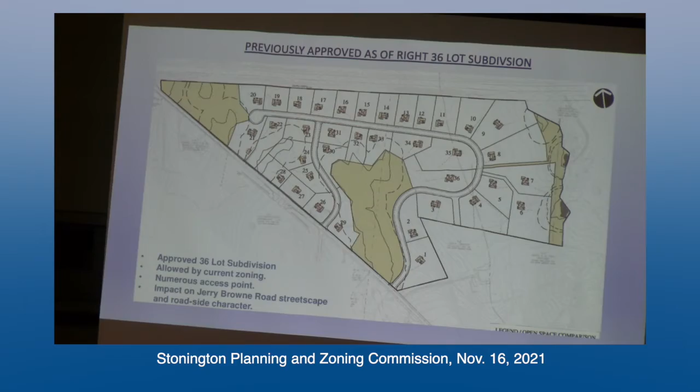What we are proposing tonight is a map and master plan amendment and a zoning text amendment to allow 120,000 square feet of professional development or medical on 8.2 acres, additional 123 apartment units on 16.3 acres, no change to the neighborhood housing of 7.7, and no change to the preservation district of 35 acres of open space.

Tonight you'll hear from Dave Lattizori regarding the completed development, Gene Winchester regarding the medical development, Don Poland regarding municipal fiscal impact, Dave Sullivan regarding traffic, Todd Ritchie on engineering, and Rob Goodman and Tim Wentz regarding the architectural design. And Jim Cowan is also here to discuss any wetland issues that may come up.

I will not steal their thunder, except to say I've been a patient at the Hartford Healthcare Facility. The access and parking were convenient. The waiting area overlooked the open space and was beautiful. It added immeasurably to the experience. The examination room was up to 21st century standards, as you might imagine for Hartford Healthcare. These facilities give Stonington residents and the surrounding southeastern Connecticut area world-class choices and options in medical facilities and housing.

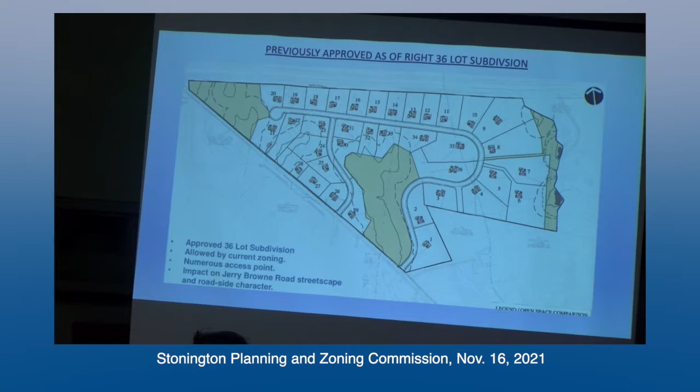Up here before you is the 36-lot subdivision, which was approved as of right for this site. It only preserved 15% of the property as open space. It was comprised of 36 single-family houses on 1-acre lots with around 8 curb cuts out onto Jerry Browne Road. And I was 1 week from selling this to a home builder.

And a resident at Stone Ridge, a doctor, approached me and said, "Is there something better you can do with this site?" And I went back to my family and I said, I think really there is something we can do better.

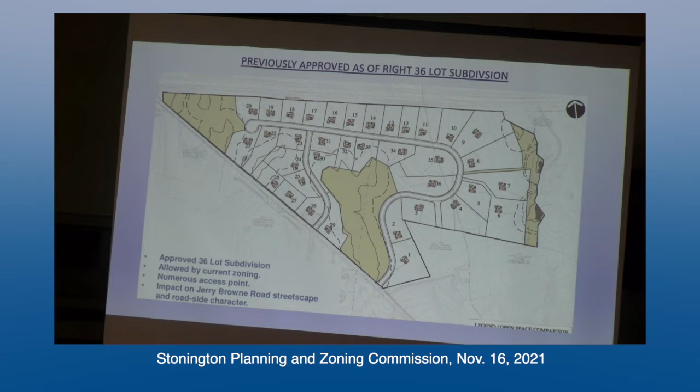I'm not an out-of-touch, out-of-town developer. I've grown up in this town my entire life. And after taking care of my dad from age 21 till when he passed away at age 27, I brought him to healthcare facilities all throughout multiple states. In addition, I came back and I gave up top jobs in New York to come back and take care of my father and our family business. And there was no housing here for people like myself.

And in addition, I always heard concerns about maintaining the rural character of Jerry Browne Road. So I said, what is the highest and best use for this site? And what we came up with was the Greenway Development District. And that preserved over 50% of the property as open space. And as you can see from our previously approved master plan, it effectively provided 4 different types of uses: preservation, village housing, neighborhood housing, and professional development.

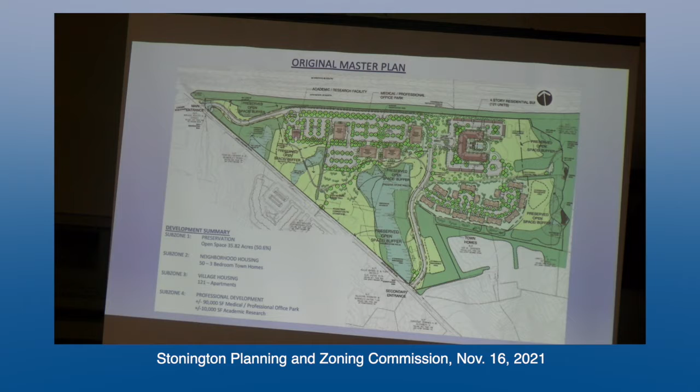You can see the 4 different types of uses here, and the largest use, of course, is the green space along Jerry Browne Road. And if you note that all that green space is pretty much continuous, the idea and thought process behind that was to establish wildlife corridors and maintain the rural character of Jerry Browne Road.

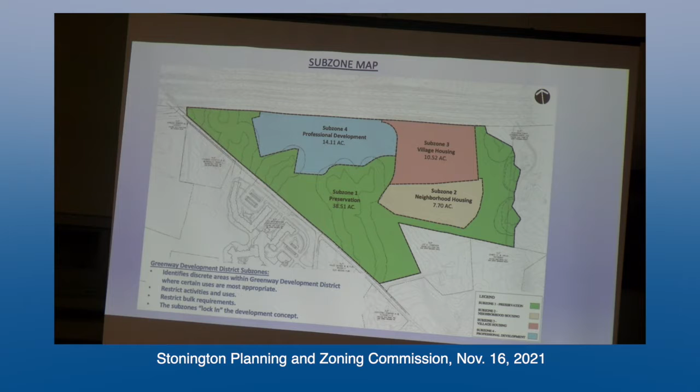This project has really exceeded all of my expectations. It went from a project that I didn't think we could ever get approved, that after going through 5 public hearings, I think we have something that I hope the town can be proud of in this commission. I was also surprised at how quickly it sold out and how well it did, with limited adverse impacts on the surrounding neighborhood.

So what we're proposing tonight is to expand upon the most successful aspects of the site. Number 1, that's the medical care, which has provided expanded medical care to this region, as well as housing. So what we're asking is to condense subzone 4 professional development to allow for 1 larger building for ease of access for our patients, so they don't have to go in and out of multiple buildings. And we're also asking on the remaining land left over, which is the most secluded area of the site, for an additional 2nd phase of the apartments.

It should be noted that I'm allowed to build 15 units per acre of senior housing. However, with this text amendment, we're requesting a variation that will allow 15 units of market rate housing. So the density is the same, but the use is changing slightly. And the idea is that we can build upon the success of our current phases.

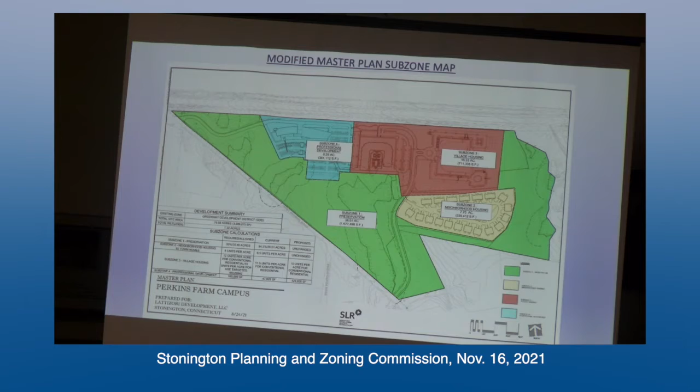Just quickly, what has been developed so far: we developed a 47,000 square foot state-of-the-art ambulatory care center for Hartford Healthcare. It houses full imaging, multiple specialists, primary care. It really has become a destination for quality health care in this region. When COVID-19 first set up, I worked with Hartford Healthcare to set up the first COVID-19 testing center in this town, and they were also the first facility in this town to offer vaccinations to the public.

Construction was supposed to take 18 months. We completed it in 9 months. It was supposed to take 2 years to be fully occupied, and it was over capacity prior to construction.

We also developed a 121 unit apartment complex. It was named Apartment Community of the Year by the Connecticut Apartment Association, which governs all apartment communities in the state of Connecticut. Although we opened the first week of the shutdown, we were sold out in 6 months. It was expected to take 24 months to construct this building and all the supporting infrastructure, and we completed it in 13 months. It was expected to take potentially 18 months to lease up, and we leased it in 6 months. We've been sold out since.

We also developed 50 townhouses next door called Perkins Reserve. The home builder won Home Builder of the Year award in Connecticut for this development. It was supposed to be constructed over a 5-year period and sold out over 3.5 years. The final building will be complete in around a month and a half, and the entire project was sold out in less than a few years.

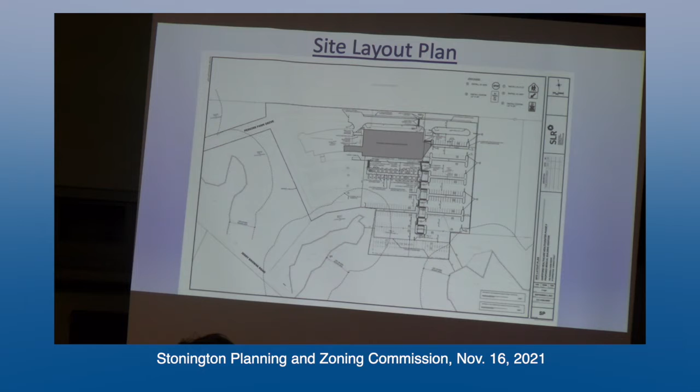Stormwater management was actually planned ahead for this project for the second phase. On the west side, go back to here, you can see it better. You have that large stormwater retention basin that's like kidney shaped on the west side of the building. And that has capacity for the additional parking lot area to the east and south of the building.

But the very south, which is beyond the existing curb line there, as you can see in those 2 parcels to the very south, those will be directed towards the southwest wetland. And they'll go through a grass swale and then enter an underground stormwater infiltration system, and ultimately under extreme storms overflow through a pipe and discharge at a stabilized outlet into the wetland. This is the same plans we've submitted to the Inland Wetlands Agency and have been approved by the agency and reviewed by the town engineer.

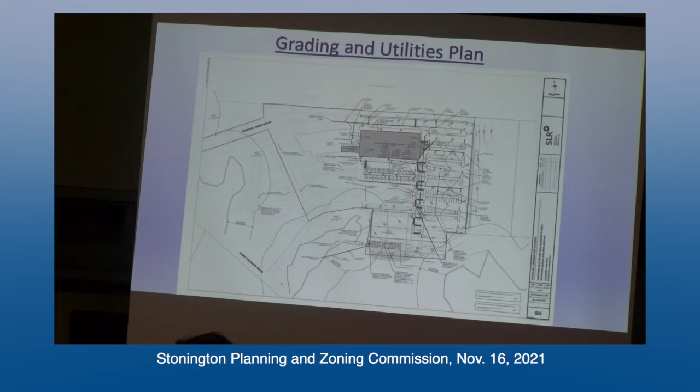This is the erosion and sediment control plan. You can just kind of go through. There's perimeter linear controls, which are silt fence and straw wattles. Then you have stockpile areas, which are the circles throughout the parking lot areas. We have temporary diversion berms to temporary sediment trap areas, which you can see are located to the southwest and southeast, this sort of rectangular shapes that will be temporary sediment traps prior to discharge of the runoff towards the wetlands by grades.

Ultimately, for the finished site, you'll have curbing that will direct the flows into the stormwater management system for treatment prior to discharge. We also have inlet protection with hay bales and also filter sacks that go in the catch basins, and a variety of other controls, stabilized construction entrances with crushed stone, and also check dams and diversion swales.

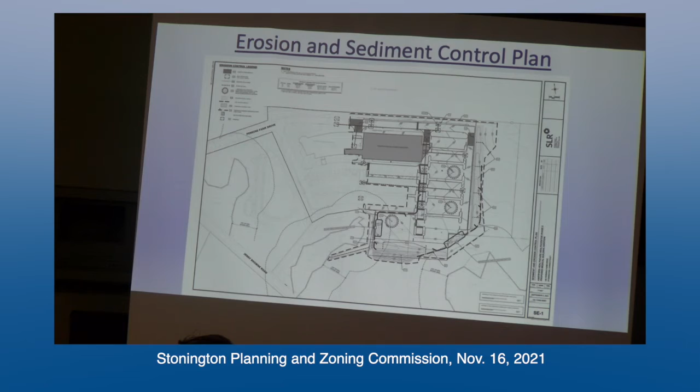This is the landscaping plan rendering. It's going to be basically a continuation of the existing landscaping scheme that's on the property. I'll run through some of the plants. I'm not a landscape architect, but just for information, there will still be red maple up along the access drive, Perkins Drive. There will be river birch, which is directly central to the building on the south, closer to the building.

Sawleaf Zelkova will be throughout the islands and also to the southeast, with juniper ground cover and mountain laurel, feather reed grasses, and bitter panic grass. That's the planting layout, consistent with the existing planting list.

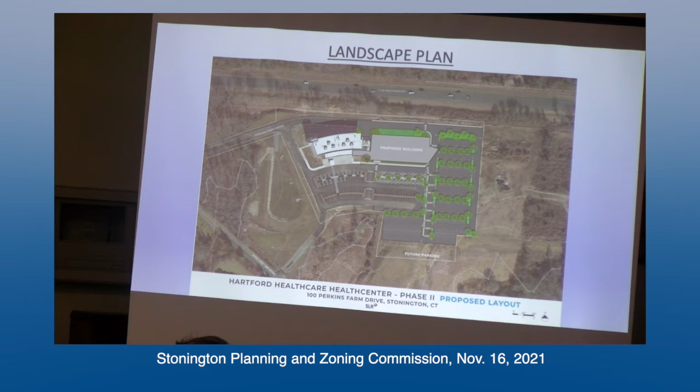There'll be some boulders incorporated into the end caps of the island, similar to what's out there now, as you can see. These are photos of the various plantings that will be incorporated, similar to what's out there now, including the laurel and the river birch.

This is the pavers that will go around the trees in the protected accessible route in front of the handicap parking spaces, along with some of the grasses and ground covers.

Site lighting will be of these styles, similar to what's out there now: bollard lighting and street lamps. And I think that's it for me, if you have any questions.

Are there any questions? Do you have any visual renderings from the perspective of the top of Jerry Browne Road looking over?

What are you going to be able to see from the street, from Jerry Browne Road, either directly looking at it or as you're coming into the building with the extension of the parking lot? I don't have a rendering for that, but that may be more appropriate for the architect to answer once they're up. Okay, because I don't see any, and I think it's part of the coming packet.

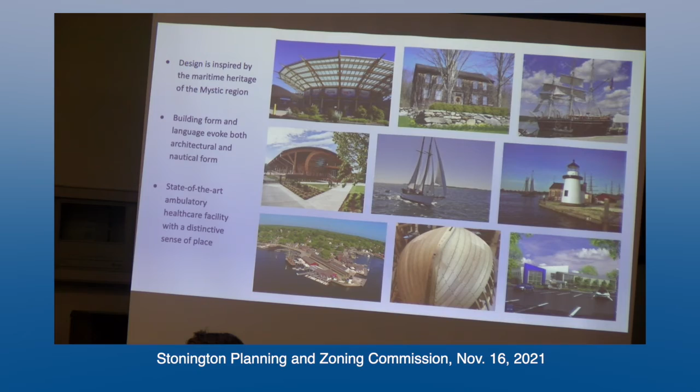Thank you for your presentation. Can you bring the existing site plan back up? I think it was the first slide.

Okay, so if you look at the topo in the two lots central to the map, the two distinct parcels, is that the northern tip of the visual buffer, the berm that was built as part of the early phase of the project?

Yes. Okay, the contours on that show really steep side slopes. And I've taken a look at the early plans for the project, the Loureiro plans that were developed, and the berm is shown on that plan, and it doesn't show slopes like that at all. The slopes are much more gentle.

So as part of this portion of the project, because it was a concern of this commission when the bond reduction came before us, and I don't want to get into it any more than this at this point, I don't believe it appears that was built in accordance with the plans. The slopes aren't the same, the shape isn't the same, and the landscaping of it certainly wasn't done according to the plans.

It was supposed to be seeded with crown vetch, and in looking at the comments of other commissioners in advance of this evening, the issue of invasive species on that berm has been raised. So this commission has questioned the berm and the way it was built, and it does not appear to have been built in accordance with the plans.

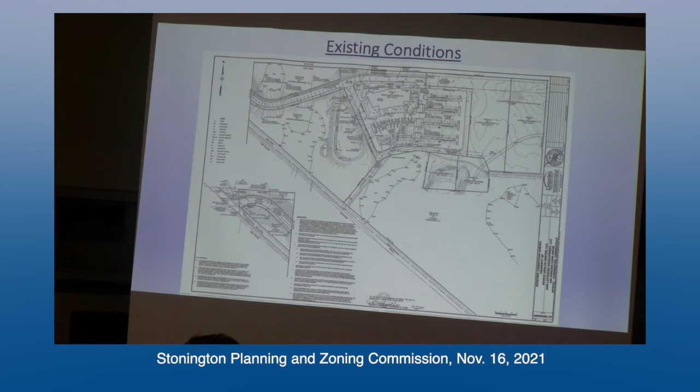Let me see if I have a couple of other minor questions. You indicated that the stormwater management for this phase of the project was going to be infiltration and subsurface galleries? It's going to be a combination of both.

I apologize that we didn't outline the basin on this layout plan, but this is more so for buildings and parking lot layout. But on the grading plan, yeah, so that was good, there you go, that works.

Is there anything to do with the revised grading and the extension of the parking lot? I realize we're going to connect the driveways with the residential and eliminate the extra emergency access roadway as part of this project. But assuming that doesn't happen for a while, and the emergency access has to function for a while, is there anything in the grading plan that will obstruct the emergency access from continuing to function until that connection can be made?

No, okay. And as far as your previous question regarding stormwater, yes. Above those two parcels, the delineation, to call it that, to the south, all of the new parking areas to the east and northeast will be captured and collected, flowing and discharging into the existing stormwater management area, the basin to the west.

Before going into the basin, there are hydrodynamic separators that were oversized for that area. We've analyzed all of that, and it's been reviewed and accepted by the town engineer, both for treatment and for the capacity of that basin for water storage. All it really requires is a modification of the outlet, the orifice plate, to change it to a 6-inch orifice outlet.

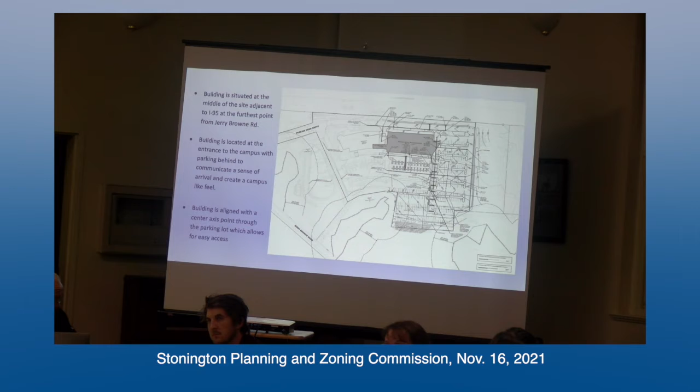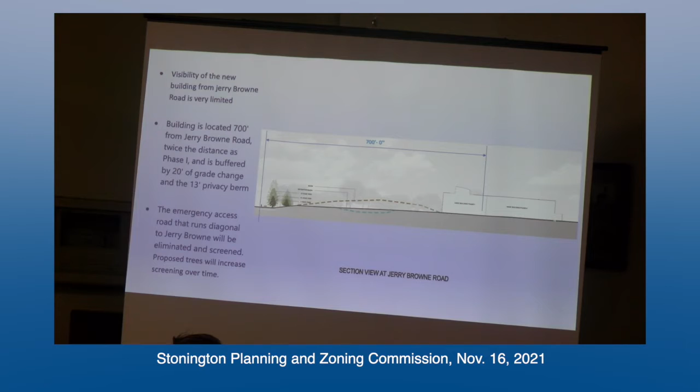This is a section, so maybe this helps explain your concern before about the relationship of Jerry Browne Road to the building. The dotted line there is meant to somehow represent the berm—it's not scientifically accurate, but it suggests where it is in relation to the building, and how it screens the view of the building from the street.

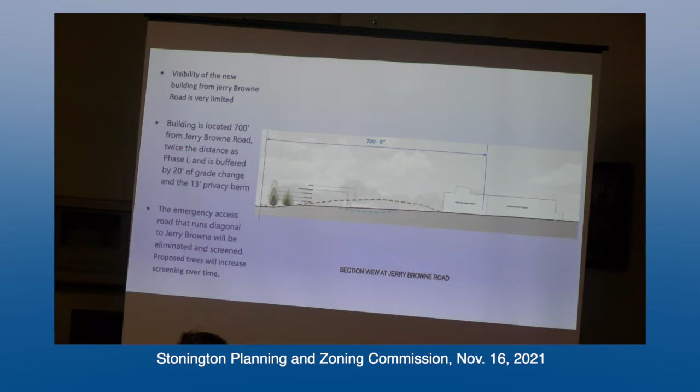You might want to call a brief recess, just to make sure he's okay. Excuse me, we seem to have a medical situation in the room, so if we could just hold your testimony at the moment, please, and make sure everybody's safe.

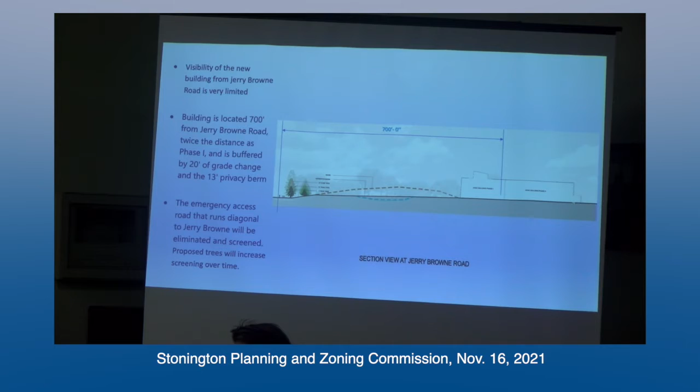This is a section cut through the site from Jerry Browne Road up towards the existing building, which has the slightly taller portion on the left and the extension to the right. It's not scientific, but meant to diagrammatically represent the berm and its extent, and that length. The blue dotted line is where the catchment basin is for stormwater, so we're trying to indicate the distance of the building from Jerry Browne Road and the fact that the berm helps screen it from view.

The upper dotted line is the berm, and it's in place, but to be clear, it doesn't extend all the way along Jerry Browne Road. If you've been there, you can see it's only in one place, so that's why we dotted it. We don't want to suggest it's always blocked - it's just something you encounter there. Does that make sense?

So I'll keep going. There are trees along the road as well that do help screen the building from view.

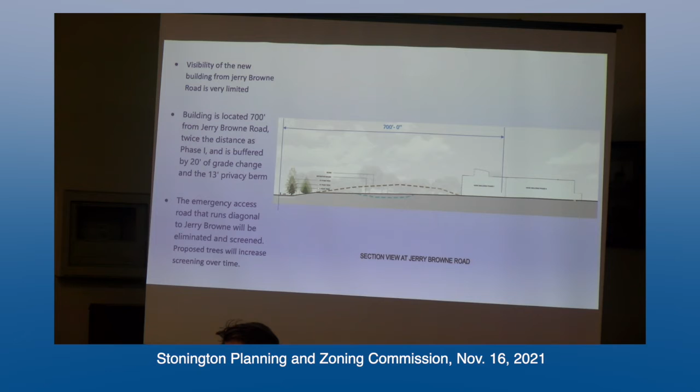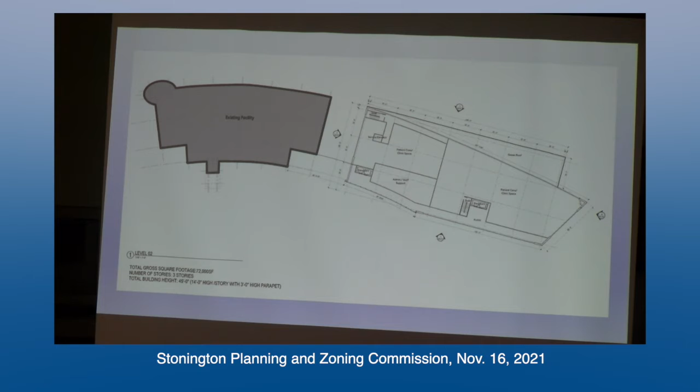But as you go up in the building to the second floor, you can see that the curve that exists in the existing building is now carried all the way across this second phase, so it starts to merge the form of the original and this building. The intent is really to make one seamless composition, and at the same time create a courtyard that screens the service areas between the two buildings, and frame the plaza that occurs in front of the building.

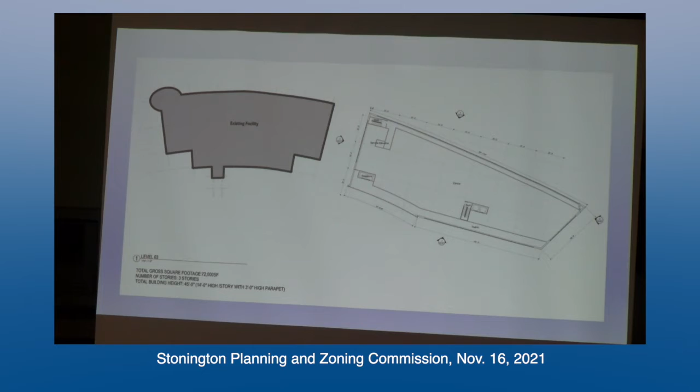And then if you go up to the uppermost floor, you can see that curve is even more prominent, and you can also see the curve on the south side is extended as well. When I show you the renderings, I think that'll become more clear.

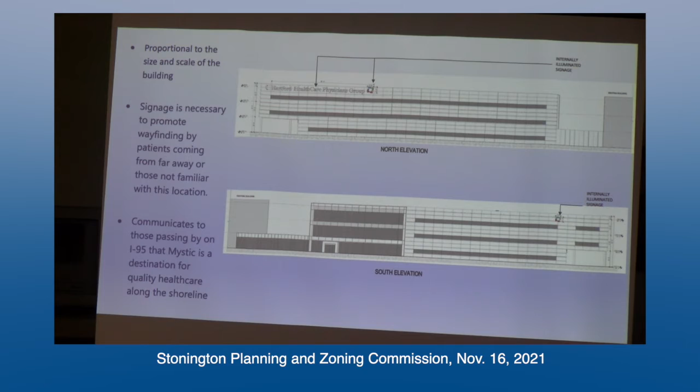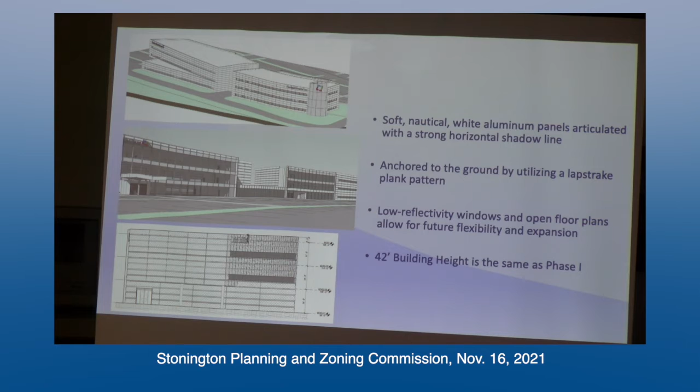Here you can see that form I was trying to explain with the curve on the upper 2 levels, but the more squared off footprint at the lowest level, which allows for more flexibility in providing the kind of procedures we mentioned earlier. And you can see here also the waiting areas retain that idea of an open, glassy expression that lets you get a lot of great light from the south, but also views out to the landscape.

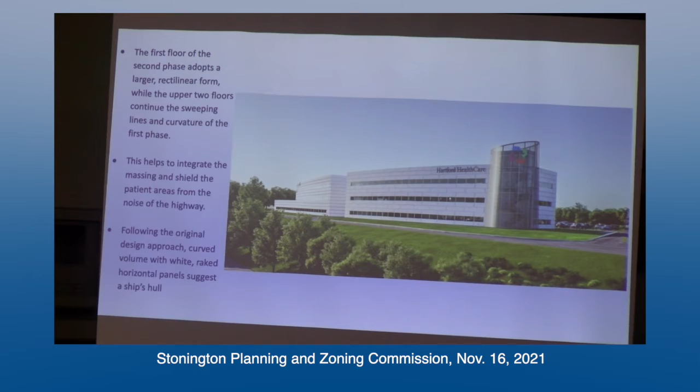So these are a couple of renderings that try to express the idea of what that building looks like - the original building on the right and the expansion to the left, and that curve carrying across, the same materials, the same glass, really meant to be a literal extension of the existing building and feel like a unified expression in that location. Again, picking up on the idea of the nautical heritage, and the slightly curving form of the building becomes even stronger in this second phase.

And then here you see it from the south with, again, the waiting areas and the idea that it's very transparent, and that the little plaza we created on the south side with the seating - if you've been there, you've seen that seating - the idea is that it becomes almost a quasi-civic space that could have health fairs and things like that, and this second building actually helps reinforce that as well.

You can also see there's a 1-story bridge that connects the 2 buildings, so that, as we mentioned before, there's really a sense that you have a one-stop shop and you can go amongst all these facilities indoors in a convenient way.

So I think that's really all I had to show. Do you have any questions? Are there any questions from the commission?

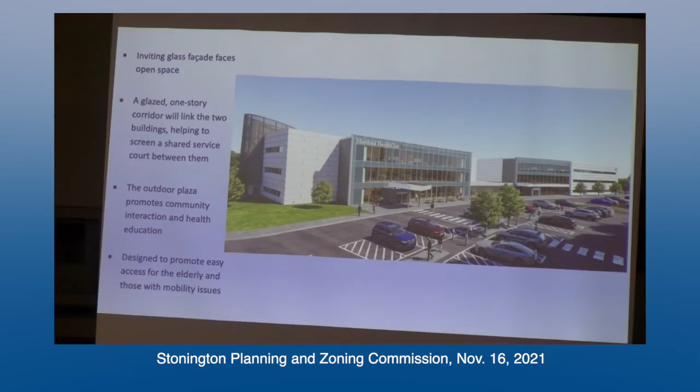I have a couple. A lot of your presentations, and especially something like that, you always put phase 1 in the foreground. It didn't take me long to figure out, oh okay, phase 1's in the foreground on every single sheet we have, I believe. And to my mind, that's not a little sleight of hand, but it does show it's diminishing in its trajectory, but in reality you don't have any drawings of it the other way around.

Yeah, and that's okay. But what I found, on your north side, you have 2 stories with that rain garden that breaks up the large facade of the building. And that's on the Route 95 side where no one can really see it. I was wondering, is there any way to flip-flop that and put the rain garden on the south side, the roof garden, on the south side, and you'd have less of a 3-story facing the south in the parking lot, making it less visually wall-like. Do you know what I'm trying to say?

Yeah, no, I understand what you're saying. I think the main idea was really to carry the curve across, and for a long time we actually just had that curve for 3 stories on the north side, and then Hartford Healthcare asked if they could expand that footprint out along that side. So I don't think there's really much interest or programmatic reason to extend it on the south. It wouldn't necessarily serve a purpose that would help. By squaring that off, it allows for a certain more flexibility in terms of procedure space.

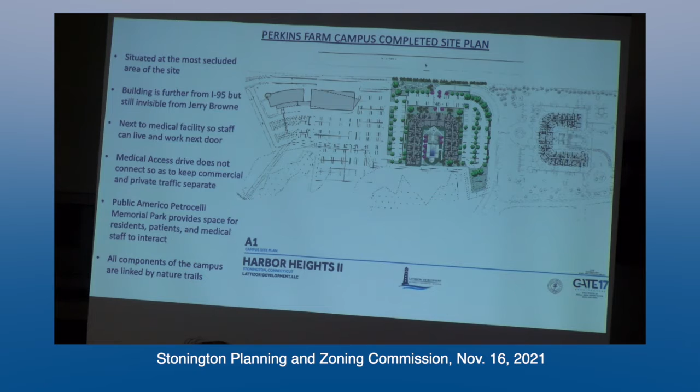Now, we've added around 25 pine trees there. However, they're only a year old. They're 8 to 9 feet, but they're supposed to grow 3 to 4 feet every year. So the idea is that they will grow over time, and as we fill in that viewpoint, it's going to obstruct a lot of the view.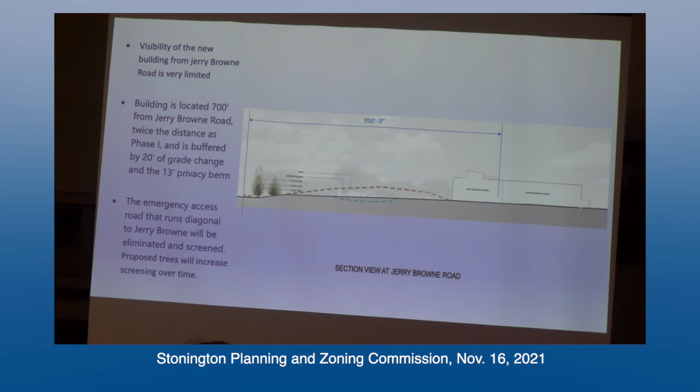That being said, I'm not David Copperfield, I can't hide a 120,000 square foot building. But if we look back at the final proposed master plan, the only resident that is impacted is actually across the way at the southern wing—I think it's building 3 at Stone Ridge. And there was a resident there who did have an issue with the lighting.

Now, she moved in after the building was constructed. However, we did automate all the blinds to go down after business hours. We looked at eliminating all the lighting, but they had to be on for life safety. So what we did is diminish the lighting, so every other light goes off, and they do go off a little later at night.

We also were looking into putting in a timer for the signage lights facing Jerry Browne Road. She mentioned that from her unit, which was on the third floor with the cleanest viewpoint, she could just about see—and if you drive by there—the eastern corner of the first phase. The second phase is really hidden behind that berm.

And even the apartments are in the most secluded section of the site. When we developed the first phase of the apartments, we actually had to spend a lot of money in marketing because no one knew we were back there. And this section of the site is immediately adjacent.

So if you go by there now, you can see a little bit of the top of the building, but you don't get the full impact. Those are some of the things we've done to try to diminish that adverse impact. But that being said, it is a large building. We went to tremendous lengths to move it across closer to the highway. So that is unfortunately an issue we're dealing with as we move forward.

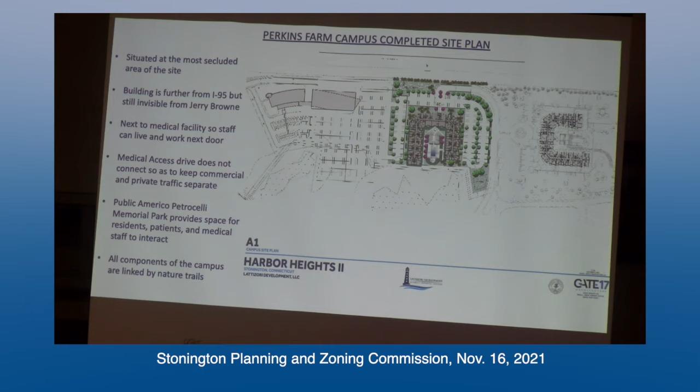I'll bring up Tim, my architect, for the apartments.

My name is Tim Wentz, and I was the architect on the original residential building. Because of its success, David asked me back to create its sister building, which we have done. It's basically the same shape, configuration, and the amenity packages will be the same.

Excuse me, Mr. Wentz, one more time. I don't mind if you take your mask off, if it helps with the microphone. Thank you.

As I was saying, this is a sister building for the first phase. And because of the success of the first phase, we wanted to create something pretty much identical, with just some modifications within the units themselves.

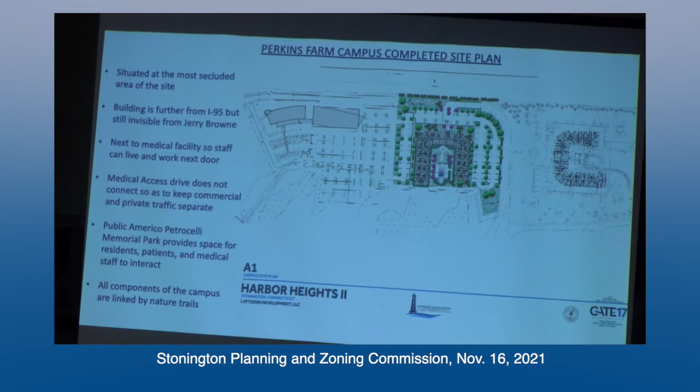This building is set back further from I-95, and I go up northbound on I-95 a lot, and I can barely see my building in the first phase, I'm always looking for it. You only see the top of it and the cupola. So I feel pretty confident you're not going to see this building at all from I-95.

Although the roads are separate and the entrances are separate, we do have two areas where the parking lots are joined for emergency access. There are two entrances for emergency vehicles off of Jerry Browne Road, and the parking lot on the medical side could be accessed from the residential parking lots.

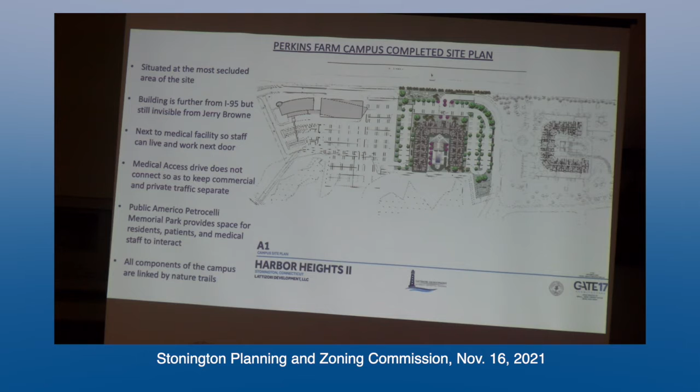Because the building is set back, we're able to create a lot of green space in front of the building before we get into a parking field, and we are able to create a public park for residents, patients, and medical staff to interact. All the components of the campus are interconnected with nature trails.

This is a blow-up of the site, and from this you can see that our U-shaped building has that same courtyard amenity package. There's a pool there. There's a gazebo for grilling. There's a gazebo for what we call the living room, which has a fireplace in it. And then there's also a separate fire pit.

It's heavily landscaped, and we typically find that when we create these kinds of spaces, the units which look down on these spaces are more popular than the units that look out onto the parking lots. It's just a fact. It's a very pretty view, even at nighttime when the pool is lit up.

Within the building itself, the amenity package is pretty much the same as the first phase. It will have its own wellness center, a clubhouse with a cafe in it, and of course the locker rooms. It will have a small business center for people that want to use it, and of course some modest leasing facilities there too.

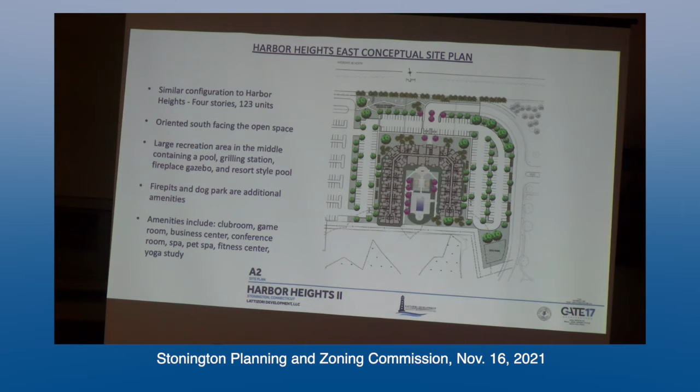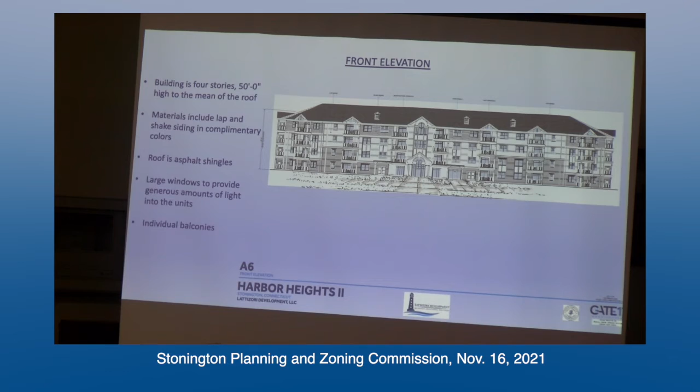And of course, what's very important for any resident in these apartments, and the first thing that strikes them, is there's a lot of windows. We use large windows, 3x5, and most rooms have a double window. What that does is create a feeling of lightness and airiness in the apartments themselves, so you can take a relatively small apartment and it makes it look a lot bigger.

Each one of the units has its own individual outdoor balcony.

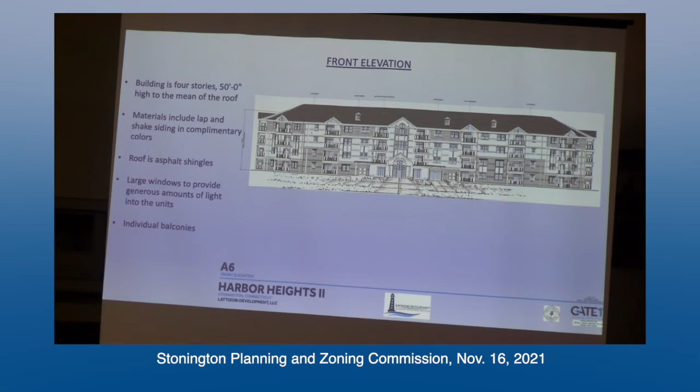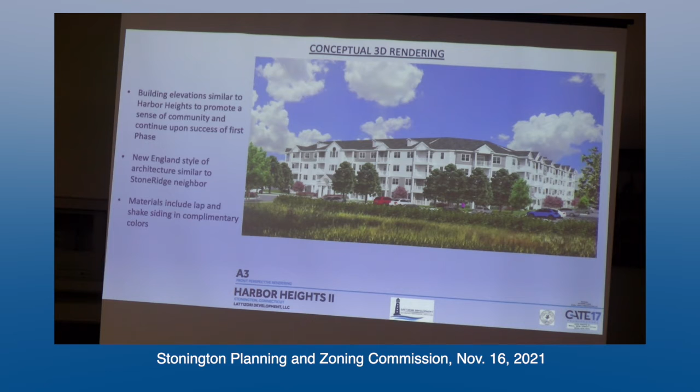One of the things I wanted to point out is that the fourth floor units are going to have lofts. Almost every fourth floor unit will have its own individual loft. We're building the loft within the roof line itself so it doesn't increase the height of the building. Historically, we've found that lofts are extremely popular with residents, especially in this day and age when you get a lot of cohabitating of units - the loft becomes an important space.

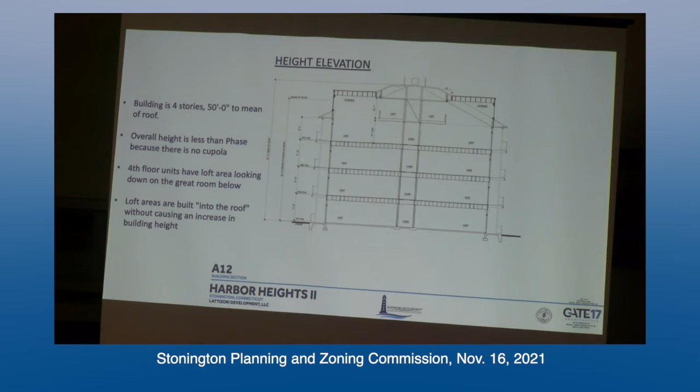The kitchens are what we would call standard fare today for a market rate apartment - granite countertops, stainless steel appliances. We typically use wood vinyl flooring. What's important is that each one of these units is individually metered for electric and water, so the tenant controls his own utilities in terms of the costs.

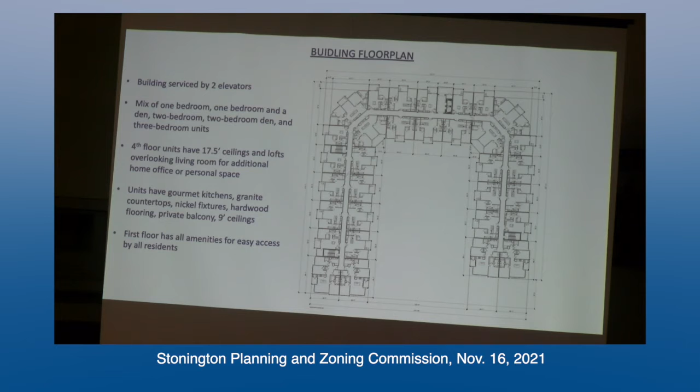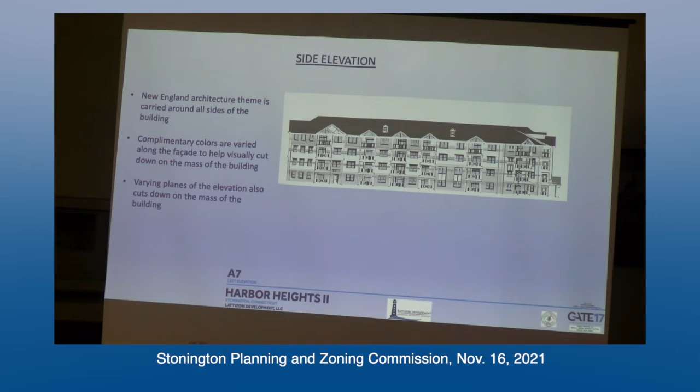This is a typical side elevation, and you can see that the New England architectural theme is carried around all the sides of the building and also the interior courtyard sides. We're doing complementary colors, and by alternating the colors and materials, we can create a building which is a lot less massive in appearance than it would be if it were monolithic in color, monolithic in materials, or even without the in and out planes that we always put in.

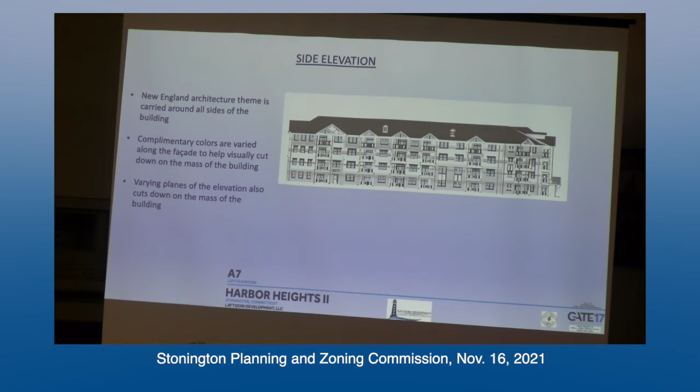These are all important amenities. You've also got a dog wash area, a dog park on the campus, and the public park there. So we have very strong active and passive amenities in this project.

That's it. Do you have any questions? I know you asked about these south elevations - I will supply them for you. It's just that we edited this package for time constraints.

Yes. Two questions for you.